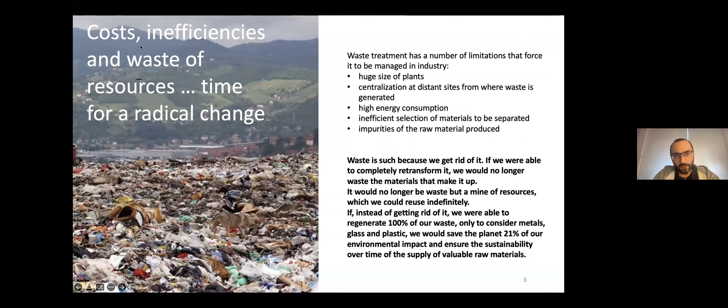So I'd like to start from the problem, that is the main point. The main point is that we are inheriting the pretty much established processes of waste management that we have learned in the past centuries, and it is essentially a very strange, complicated process, complex and complicated at the same time. Complex because there is some objective complexity in managing waste, and complicated because we do our best to make it complex.

Here you can see listed the major problems. Essentially, the process of treating waste begins in our houses, in our homes, where we start by manually differentiating such waste. We separate plastics from organic, from whatever. It depends locally, by nation and by region.

From that point on, a very long trip begins that sees very specialized trucks collect our waste on a daily basis, or on several different days during the week. Those trucks are specialized based upon the nature of the material that has to be treated, and they take it away from our homes, tens and tens of kilometers away, to the final destination. Such trucks increase traffic and the emission of CO2, and there are several costs allocated because of such treatment.

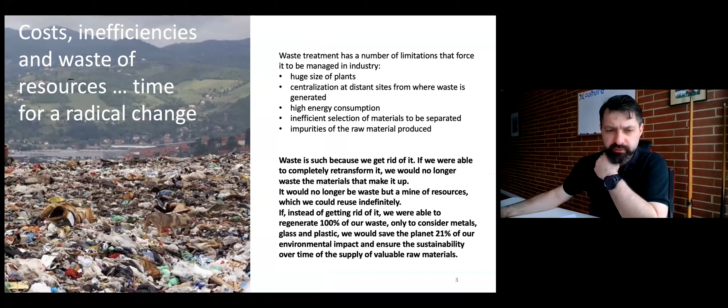Just to give you an insight, otherwise our discussion is going to be very qualitative. For example, in Europe, the numbers from Italy are very positive. This is one of the few fields in which we have a good positioning in the European charts for waste treatment and recovery. We are first or second for quality of treatment. But even if you mean your country or your company? Italy. Okay, even if we are in such a good position, what happens?

Just to provide you with a hands-on example: for plastic treatment, more than 40%, which is a huge quantity, cannot be treated. So the plastic gets out of your home, takes a very long trip to a faraway plant specialized to treat plastics, and as output you have that 40% of those plastics cannot be treated. That kind of plastic even has an industrial name, called plasmix, and you can consider those as fragments of plastic with a diameter smaller than 10 centimeters. Those cannot be treated.

So what happens to that waste? That residual waste is an enormous quantity. That 40% is collected by new trucks, again, that take it tens and tens of kilometers away to the incinerator, where in the best case you have some energy or heat production, while generating a lot of CO2, and probably also a lot of pollution. I've seen plastic burn, it's always dark black.

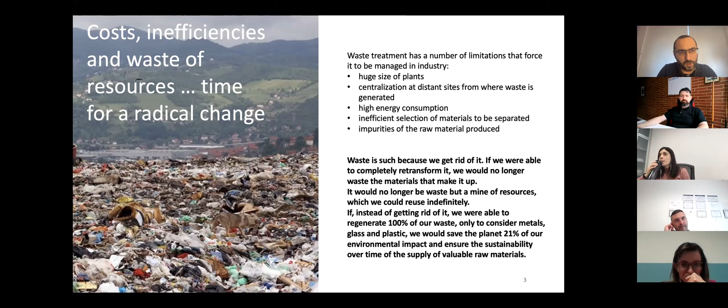I can give you numbers. I just mentioned plastics because it's quite evident and close to our sensitivity, but the problem is more general. On a per year basis, we produce a little more than 2 billion tons of undifferentiated urban waste. 2 billion - when you hear such numbers you don't have a clue what it means. But just to provide some insight: every year, to inefficiently treat those 2 billion tons of waste, we generate 1.6 billion tons of CO2.

So that's a good indicator of the inefficiency I was mentioning. Essentially, to make a long story short, to inefficiently treat waste, we generate every year almost as much CO2 in weight as the weight of urban waste we generate. And that's a very inefficient process. Plastic is a good example, but you have it with glass, paper, whatever material - metals, cardboard, definitely, absolutely.

So the first problem is managing, on an industrial scale very far away from cities, urban waste. And there's of course a lot of energy consumption. Besides the huge CO2 generation, there's huge energy consumption, and the final result is very poor, because we do that with a very romantic hope that we can recover most of the material, introducing it back to industrial processes of transformation to make new products out of those materials. But essentially the purity - an important indicator of the efficiency and effectiveness of the process - is very low.

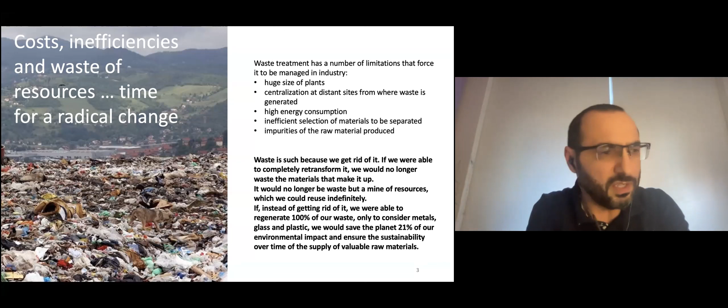You compact the bottle, put it in the plastic bag, it travels 10 kilometers from your home, and in the end, as output of the industrial treatment plant, you have huge stacks of plastics that cannot be purely separated. So the bottle plastic is just considered as bottle plastic, while there are lots of industries where the purity of the material needed is totally key - for example in processes where you generate plastics for products like a car cockpit, you need very high purity, more than 95%.

So having material that is not pure makes it very ineffective to be reintroduced back into the typical industrial transformation process. So please keep in mind that the purity of the material you have as an output is a major indicator of the effectiveness of the process.

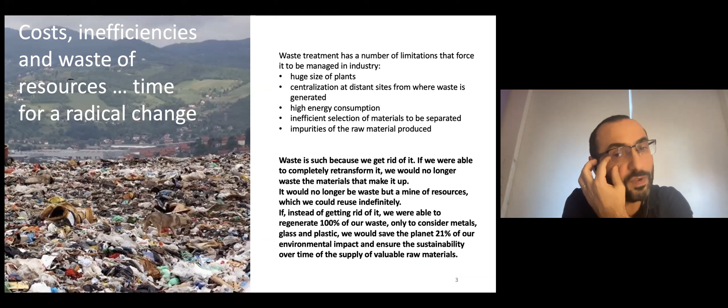So Daniele, can I ask you, when you say purity, when we have virgin plastic, is that considered 100% pure? Is that how it works? Yeah. And then when you recycle, there are different types of plastics mixed, there may be some other waste. Yes, generally speaking, you cannot expect to have pure plastics in the final consumer products in high volumes. Generally those are blends.

There is a physical process to have purity that is called depolymerization. It's a difficult word to pronounce. Depolymerization - essentially every plastic is a bunch of polymeric chains combined together through some very specific physics. To have a pure material, you should retransform the final plastics back into original single monomeric chains, and then you would have very pure plastics.

There have been some experiments. For example, the last experiments were completed unsuccessfully in Japan around 2010, to retransform final plastics back into original monomeric chains. This kind of experiment was abandoned because it was very, very inefficient - probably cost more than extracting. Definitely in terms of power consumption, but also because there was huge pollution due to the generation of CO2. It was totally ineffective as a process.

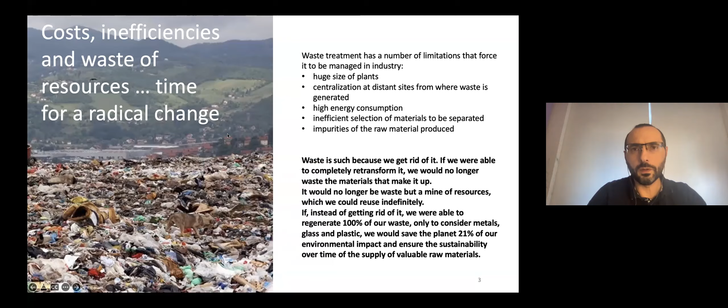I have numbers on the market, we can talk about that in the Q&A session. And we do have a lot of questions about the company itself. So I have - you're going to be very welcome. So you're planning to show the video?

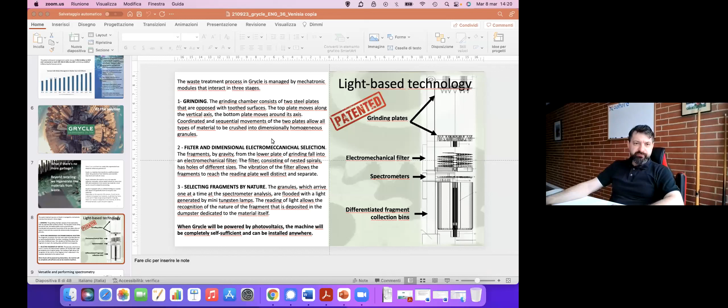Yep. No, first here we have a short scheme on how it works. Here you can see a design of our former prototype. This was the fourth version of our machine. I'm going to show you a video in a couple of minutes, but on the left you are going to see how it works. Essentially, this is what we essentially patented.

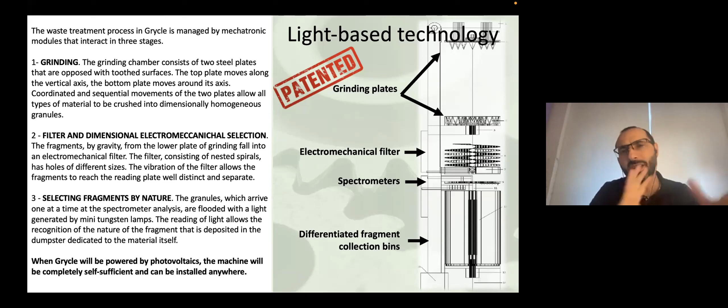Okay, so we generate an industrial transformation process on a small scale. This is a machine that is a little bit less than 1.5 meters, and the diameter is around 25 centimeters. So as you can see, the size is pretty close to that of a domestic appliance.

Essentially we do some shredding or grinding all together. We have designed machinery made to welcome undifferentiated waste and to grind it and shred it, all in one single chamber.

So what you have as an output of the first phase is a blend of flakes made of several different types of materials, and those flakes are introduced into the second stage, an electromechanical filter that vibrates and has very peculiar geometries. The objective of this second phase is to separate such flakes based upon geometric dimensions, subcategories of geometric dimensions.

What you have in the end is the third stage, and such outcome is introduced into the more sophisticated part of the machinery, where we use spectrometers. I don't know how many of you are confident with spectrometers, but essentially this is not new technology.

So far we used to have a look at planets and stars far away. If you want a clue of what a planet is made of, you just have a look at it through a spectrometer. That's an instrument that reads the photons, the subpart of light that is reflected by the surface of the planet. And if you check the bandwidth in which such light falls, you can have a clue of the material the surface of the planet is made of.

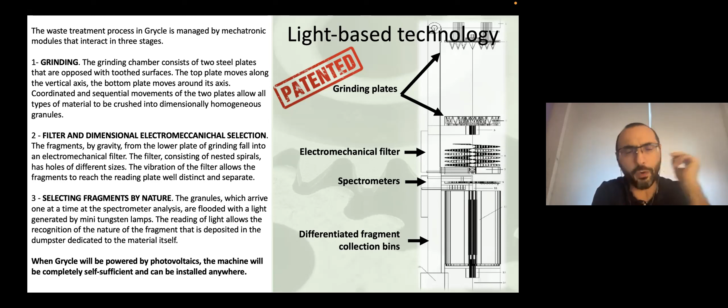But now, if I am capable of taking control, can you see I'm on a YouTube page at the moment? Yes, we can see it. I hope the sound will work, but if not, oh, not necessarily the sound.

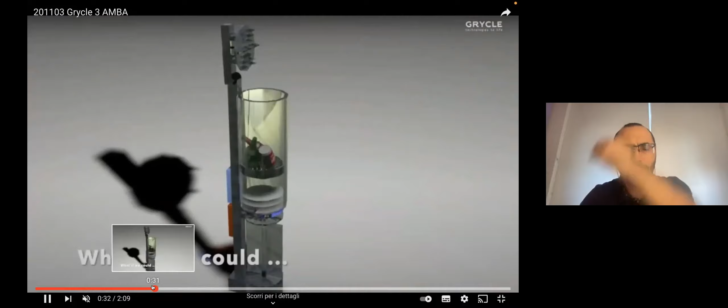It's a short video that we use for our crowdfunding campaign. There is some blah, blah, blah about the numbers, the problems, etc. But here you can see a simulation of our first prototype. So a synthesis of what I was introducing.

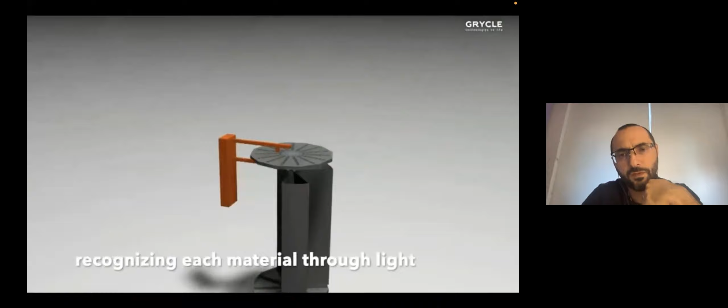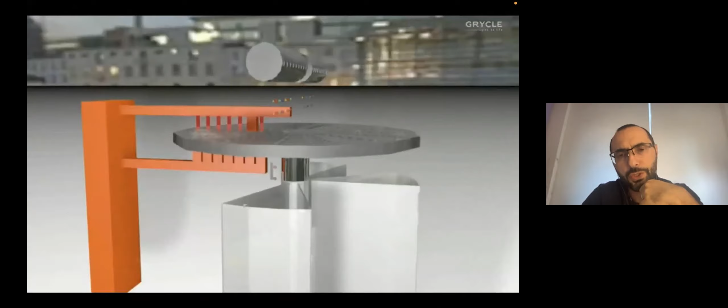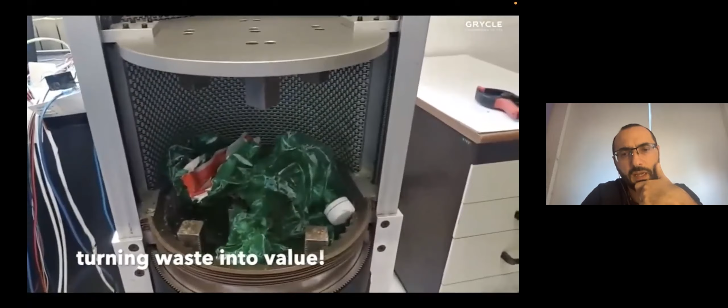Everything is shredded all together. You generate flakes that go through an electromechanical filter, and you pre-separate according to geometric dimensions the flakes that enter into the light reading. Because of the automatic recognition of the nature of such materials, those are let fall into specific containers. So what you have in the end is that such flakes are collected into separate containers based upon the nature of the materials they are made of.

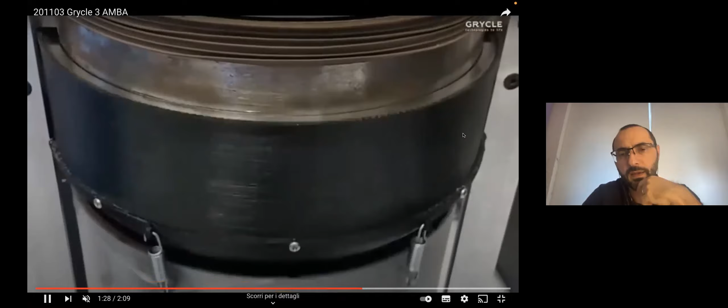Okay. So this is a short video, we'll have a look at it together until the end. So you're going to see the flakes that are let fall.

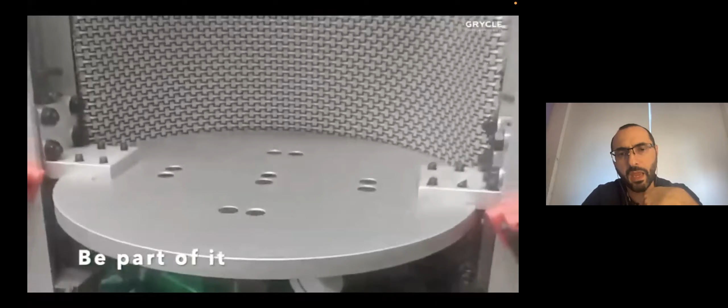So this is the actual machine, right? This was our fourth prototype. We have made during the past year a huge pivot. I'm going to show you, I'm going to introduce you.

How big is it? I'm trying to figure out, what's the size? Is it something that fits in the room? Like, what's the diameter? In this case, as I was saying, this is a little bit shorter than 1.5 meters, and the diameter is 55 centimeters. So it's more like the size of a small fridge, essentially, right?

You can consider it as a sort of a domestic appliance, but our intention was that of bringing the industrial treatment upstream of the chain, as close as possible to where the waste is generated.

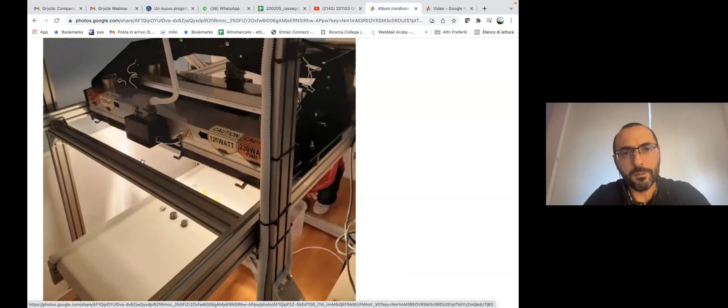But after that version, you can see here a picture of the new version of the machine. You can guess this is bigger. This is our fifth prototype, starting to have the dimension of an industrial machinery. And that's for several reasons that we are going to have time to discuss together.

Essentially, what happened since our successful crowdfunding campaign is that there are two reasons, one of which, not necessarily the major one, was that several industries started to ask us to generate an industrial version of the machinery capable of treating bigger volumes. And if you're wondering what bigger means, if you want an industrial machine, you need to talk about around 1 ton per hour as a throughput, okay? 1 ton per hour.

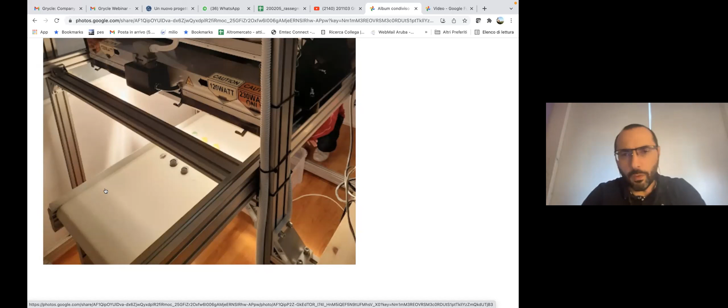This is amazing, very impressive. We had a company that participated in X-Culture several times called Recycling Revolutions. It's a traditional recycling plant, apparently one of the largest on the East Coast in the United States. This is a huge facility, it took us half an hour just to tour it. A good portion of the plastic that makes it to the facility cannot be recycled, and they only specialize in plastic, so they can't really separate all the different types. So what you are doing here is very impressive, super high tech.

As you can imagine, if you were the owner or manager of one of those factories, introducing our capability to generate very pure material would require buying closed land, building another factory, and having many people inside. While we are insisting on generating a small machine that requires very little room and that might be introduced in an existing plant, because that's going to make the difference between generating new factories and introducing such technology into existing factories.

And as you said, if it has to be a large, big factory, it cannot be in the city, right? It has to be somewhere else. And if so, you burn more fuel to get the plastic to the facility. So if it was possible to have them efficient, clean, and compact in the city, you could save a lot of that unnecessary transportation cost and waste.

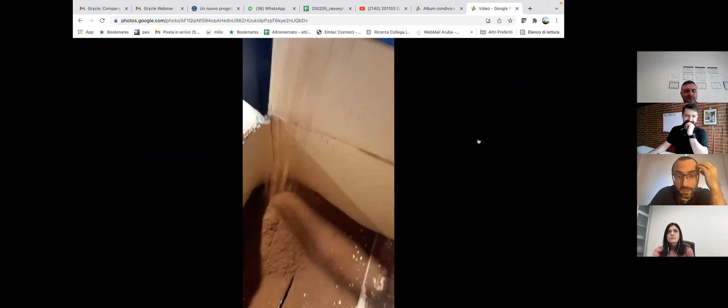That's already shredded coffee capsules. Here you can see the coffee powder automatically separated from plastics and aluminum. I'm showing you this just to give you an insight into what moving to a bigger scale means. Essentially, we started from one single machine having all three phases embedded and directly connected to each other. When we move to a bigger scale, we actually separate the three phases, introducing three different machines. So we're used to calling it a machine, but essentially it's now an entire transformation line where the three phases are executed subsequently. You have the shredding machine, the electromechanical sieve, and then the reader with the spectroscopes, and we might add a fourth phase, the separator.

So even if we call it a machine, it's going to be a line, a transformation line. Still, we keep insisting on making it as small as possible, and that's going to be our final result. We hope, by the end of next year, to be capable of commercializing the machine.

Yeah, fair enough. Stefano, you had a comment or question? I wanted to ask Daniele if you have a broad idea of what type of countries you prefer to target, geographic areas, or if you're open to any type of market. Do you prefer to start from, say, European closed markets, or some specific type of market based on characteristics more suitable for your type of product, just to give some guidelines for the people who are going to take up your challenge.